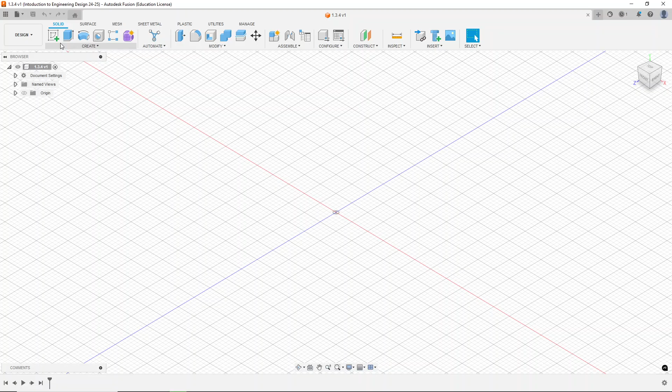So we're going to create a sketch. We're going to put this in the bottom plane, so like the horizontal plane, and we're going to create a rectangle. There are three types of rectangle tool: the 2-point rectangle, where you pick the opposing points; the 3-point, where you just pick all 3 points and then it builds a rectangle around that; or a center point rectangle. That's the one we're going to use today.

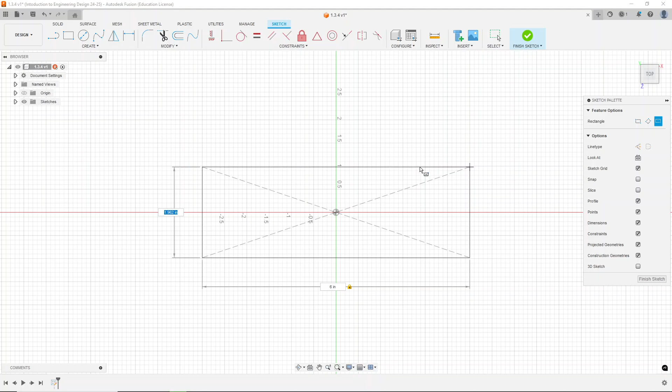So we're going to put that center point of our rectangle right on the origin, just because that will lock down a rectangle. And that's usually the best practice, is you want your geometry to be touching that origin in some way, just so it has a reference point. When you first start a sketch, there's only one lockdown reference point, and that is the origin, so we're going to make sure we use that. Your rectangle should be 6 inches wide and 4 inches tall. We can hit enter. Now we have a rectangle.

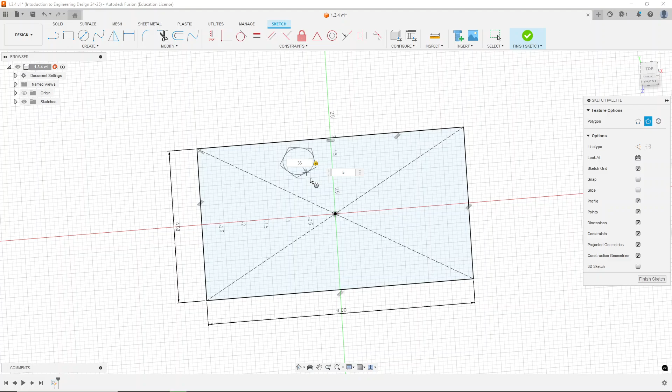We're going to add a few other polygons. So we're going to start with a circumscribed polygon. We've used this before with our hexagons from the last project, but now we're going to make some different versions. So to begin with, we're going to make a pentagon. Remember that trick, hitting tab to go back and forth between these windows. We're going to make a pentagon that has a radius of 0.35 inches. So 5 sides at 0.35. We're going to create that pentagon.

Just create it somewhere in this top region, because later we're going to make it vertical constrained to this center point. So we want to make sure it stays up there. If we put that pentagon over here on the side, it would make it a horizontal constraint. So we'll just make sure it's over there for now.

Next, we're going to create a polygon that is inscribed. We'll put that over here in the top right corner. So we're going to give that a radius of 0.25. And we're going to let it keep 6 sides because we want to keep it a hexagon.

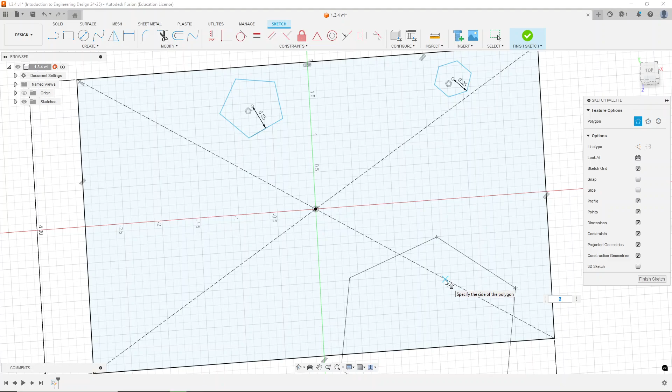And then finally, we're going to add an edge polygon. So we're going to make a triangle. This tool looks a bit different because we're just starting with a line. So we're going to get a line that is 1.25 inches long, hit enter, and all we've done is create a line. But as soon as we move our mouse cursor away, it starts to build a polygon and asks us for how many sides. So I'm going to hit the number 3. That gives us a triangle. This is an equilateral triangle, which just means all 3 sides are that same length.

So we have our 3 polygons in our rectangle. Now we're going to start constraining them to put them where we want. Now, if you notice though, my mouse has a little icon on the bottom right because it still wants to make polygons. So I'm going to hit escape to get out of that. Now I can start adding constraints. So I want the horizontal vertical constraint, which is up here. I'm going to hit the center point of my pentagon and the center point of the rectangle. Now that pentagon is locked so that it is exactly vertical of this center point of the rectangle.

Next, I'm going to hit a horizontal constraint on one of these lines. So now this line must stay horizontal. And then I'm going to hit the letter D to add a dimension, or you can go over here to create and hit the sketch dimension. I'm going to grab that horizontal point I just constrained, that line, and I'm going to grab the center point of the rectangle, and I'm going to pull it over here to the side. And now I want this to be 0.5 inches. So that just means this pentagon, this horizontal piece of this pentagon must be 0.5 inches away from the center of this rectangle.

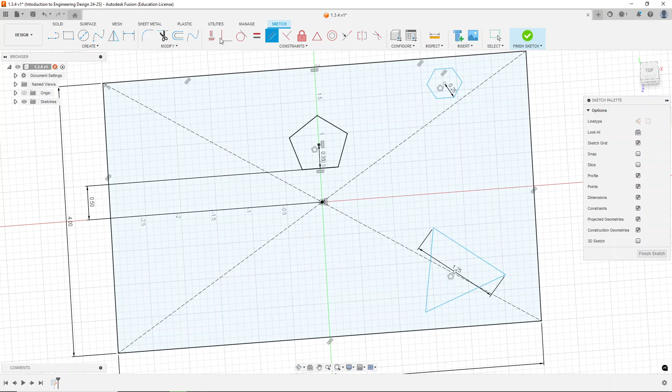Now to start constraining the hexagon, we're going to start with a parallel constraint. We're going to take one of these sides and make it parallel to the top edge or the bottom edge of the rectangle, the 6-inch length rectangle. So now that side is parallel with the 6-inch side of the rectangle. We're going to add a coincident constraint. We're going to make the center point of this hexagon be coincident with this line.

And now we're going to add, by hitting D, another constraint from the center point of that hexagon to this edge, and we're going to say this needs to be 0.5 inches as well. So now that hexagon gets pulled up into the side.

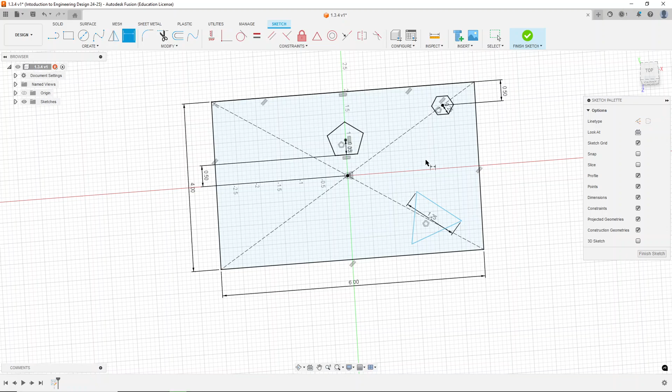Finally, we're going to constrain this triangle. So we're going to add a coincident constraint at the tip. Just be careful, make sure you get that little white dot. So we pick the tip of this triangle and then the tip of the rectangle, so those are now coincident. And then we're also going to add a coincident constraint with the center of the triangle and this dotted line.

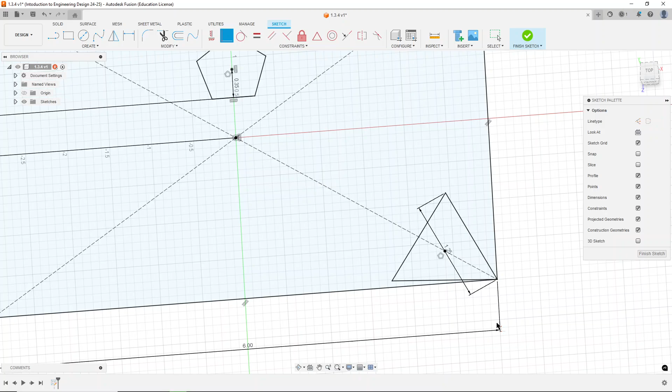So now looking at this sketch, you should get in the habit of looking for these black lines, because this tells you that your sketch is fully constrained, which just means if I hit escape to get out of my tools, if I try to drag any of these lines, they're staying where they should be, which is good.

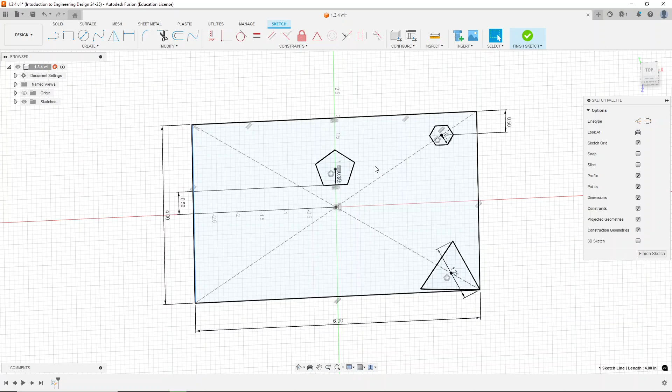So when I start to mess with other numbers later on, it's not going to affect the placement of these objects. So continuing on, we're going to start adding some more patterns. We're going to use some new tools. So some of those tools, if we go here to this create section, we have circular patterns and we have rectangular patterns.

So to begin with, we're going to create a circular pattern of our pentagon. So we hit the circular pattern tool, and now we get this new palette up here. We're selecting our object, so we're going to drag and drop over all of our pentagon. Alternatively, I could go through and just click each of the 5 lines of our pentagon. After I do that, I'm going to hit over here.

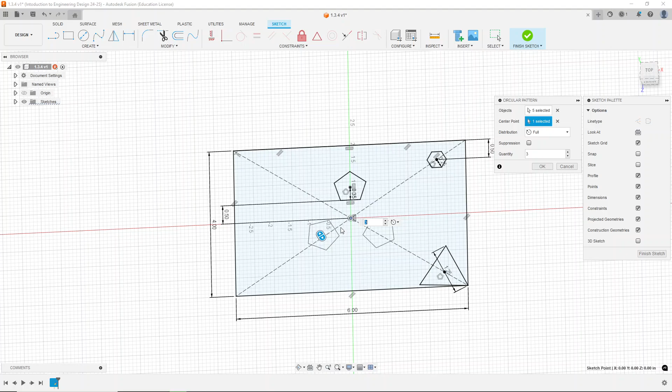So now I get to select the center point of my pattern. So I want it to be the center point of this rectangle. So it automatically gives us a pattern with 3 pentagons. I want 5 pentagons though, so once we do that, hit OK. Now we have 5 pentagons that have rotated around that center point of our rectangle.

Next, we're going to create a rectangular pattern. I'm going to select our hexagon, and then we get a couple different numbers we can put in.

We're going to leave it at, we're going to go from extent to spacing rather, and rather than selecting our directions, right now we have these 2 arrows. If we start to drag either of these arrows, you can see how we start to space out some additional hexagons. We're going to call this -0.7. That looks like a good number, and we can leave it at 3.

Now, if we grab this other arrow and drag it down, we start to get more hexagons. I don't quite want 3, I want to just do 2 rows of hexagons. So now we have 6 hexagons in this position.

And if you look at the window over here with our rectangular pattern palette, we have those directions, and we can say symmetric, and that would split it up evenly on both sides. We're going to stick with one direction though. So we have our set down here: quantity, distance, and direction.

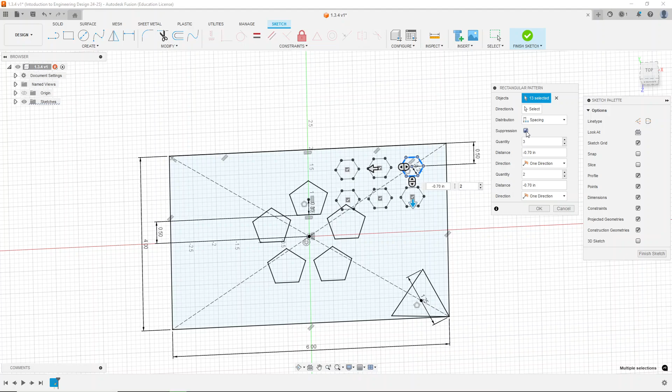Those are our hexagons going down. And then our quantity, distance, and direction, these are our hexagons going to the left. If you look though, one of these hexagons is overlapping with the pentagon, and I don't want that. So I'm going to hit suppression, and then we get these little check boxes that pop up on all these hexagons. I'm going to click this one, and that means that hexagon is not going to be created in this pattern. So now I can hit OK, and now I've created 5 hexagons in this pattern.

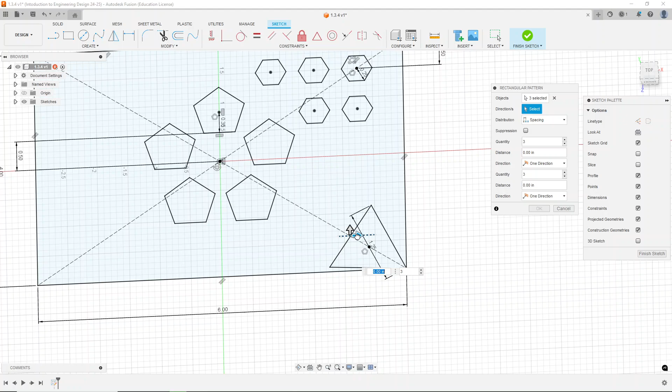Finally, I'm going to create another rectangular pattern for this triangle. So I'm going to select all 3 sides of the triangle. You see objects selected, I have 3, each of the 3 sides. For directions, rather than doing the left and up like we just did, I'm going to choose this line, and I'll get rid of that direction. So now we're going to go along this line.

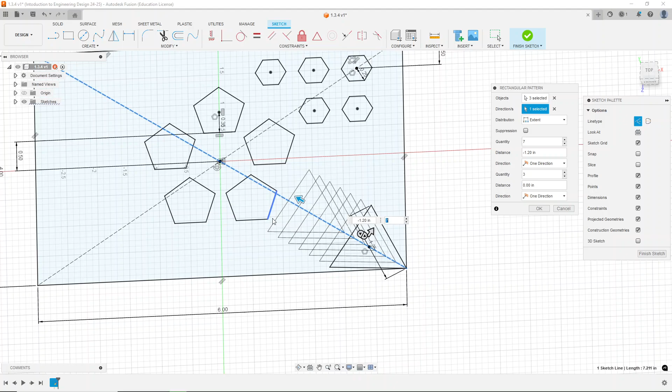I want 7 triangles, and let's just bring these down enough. We'll go to extent. So the difference between extent and spacing: for extent, I'm just telling it how far out the triangles are going to go, and then it's going to space out however many I tell it to put in there. If I go to spacing, I'm telling it how much distance should be between each of these triangles. So we'll go with extent for this one, and I'm just going to pull it back just enough so that it doesn't overlap with that pentagon we have in the middle. So let's do -1.20 inches for those 7 triangles.

So now we have our patterns up here, and we're going to finish our sketch at this point.

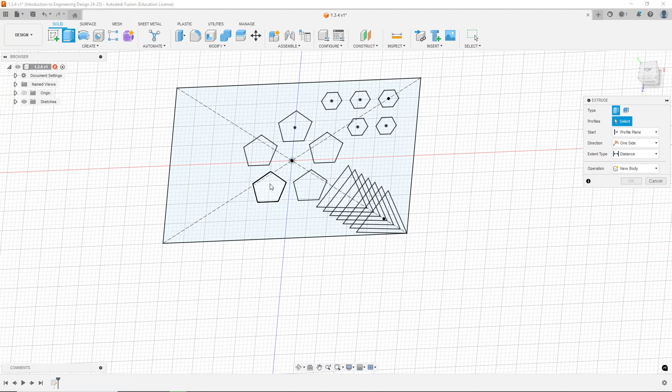From here, with our sketch up, we're going to create an extrusion. There are a lot of different sketches we can choose from, but first we're going to choose the rectangular base in general. We're going to grab that, and then grab a few sections of these triangles. I think we take this first triangle, and then we're going to alternate with these others, so we create this kind of arrow-like shape.

So now we have these 3 cutouts that remain from our triangles, along with our 5 hexagons and our 5 pentagons. Let's extrude that. Let's go 0.2 inches. Seems like an appropriate depth.

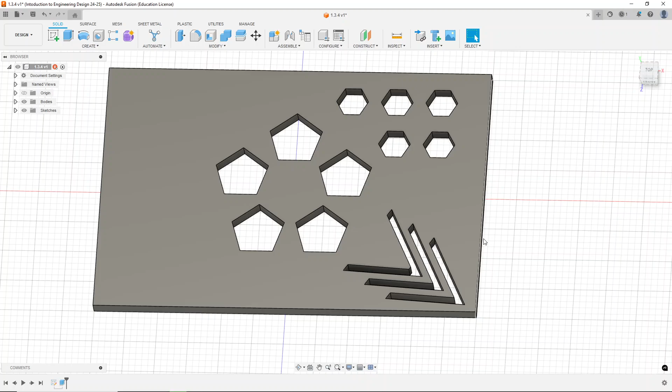Just like before, anytime you use a sketch to create an extrusion, your sketch disappears. But if we hit this drop-down arrow, we can hit the eyeball, and our sketch comes back underneath, and we can use that to build on later if we need to. For our purposes, though, we're going to create a new sketch, so I can hide that sketch since we don't want it to confuse our geometry right now.

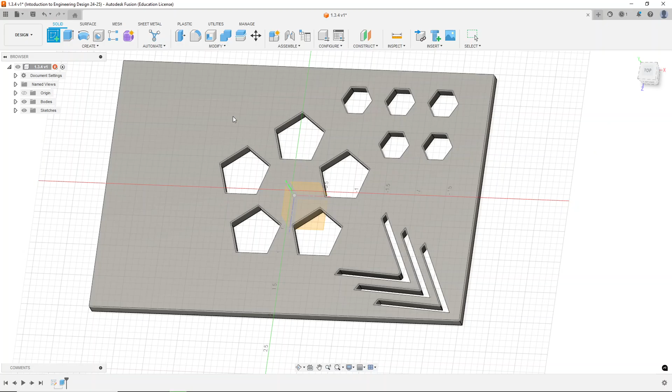We're going to create a sketch on the top surface of this thing we just created. So don't choose the orange squares right now. We want to choose the surface of this object we just made, because when we do that, we get the lines that are in this object as part of our sketch geometry.

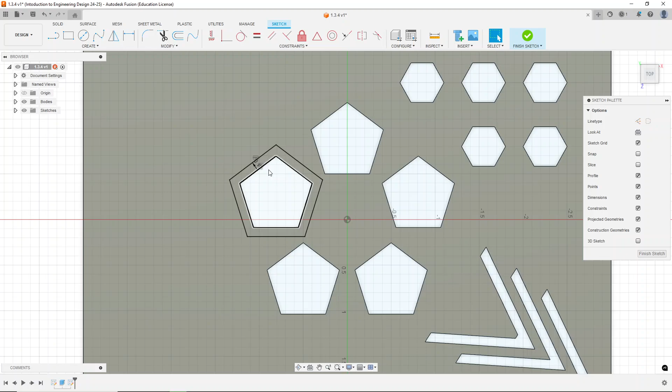Now we're going to create an offset and choose 3 pentagons. I don't care which 3 you choose. I'm going to start with this left one, and create an offset that is negative 0.1 inches. You see it creates a line that is just offset from the hexagon or pentagon that already exists. I'll do another one over here, negative 0.1, and I'll do this one down here, negative 0.1.

Now looking at our pentagons and our offsets, some of these interact with one another, and we don't want that to happen. So now I'm going to go to modify, and we have this fillet command. So we're going to create some fillets.

If I put my mouse cursor right on the tip of a point where I get that white dot, it gives me the projected view of what the fillet would be. If I choose a line, it's going to wait for me to pick the other line to fillet. So any 2 connected lines, you can create a fillet, or you can just choose the point that you're wanting to fillet. So I'm going to choose this point.

I'm going to give it a 0.2 inch fillet, hit enter, and continue doing that for all of the points on all 3 of my offsets. So: fillet tool, pick the point, 0.2 is our radius for our fillet, and then repeat for each of these 15 points.

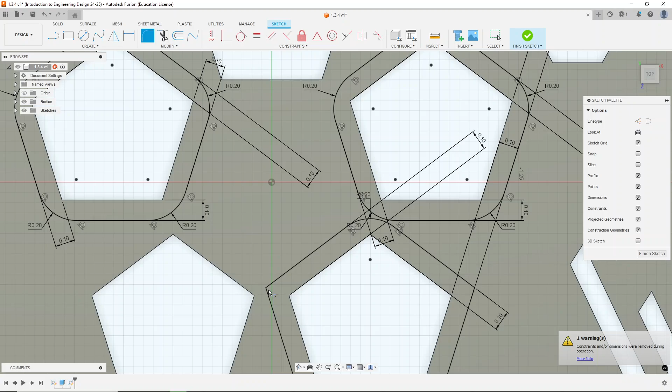Something you can do as well, if you just right click, there's the repeat fillet button. So rather than going to find it each time, you could do that. If I right click, repeat fillet, I can grab that fillet tool right away.

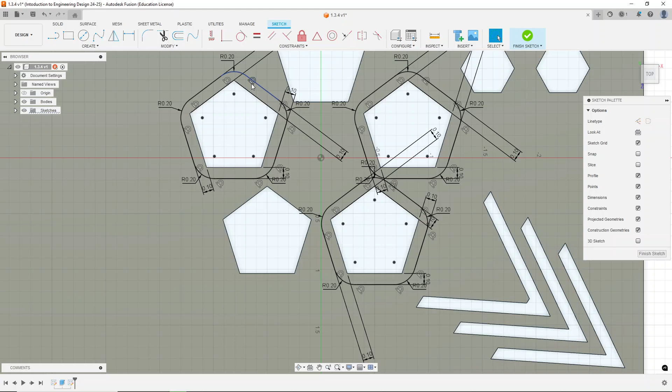Perfect. So now I have fillets on all of my 15 corners of the pentagons I just created, and I no longer have them intersecting. That was really tedious.

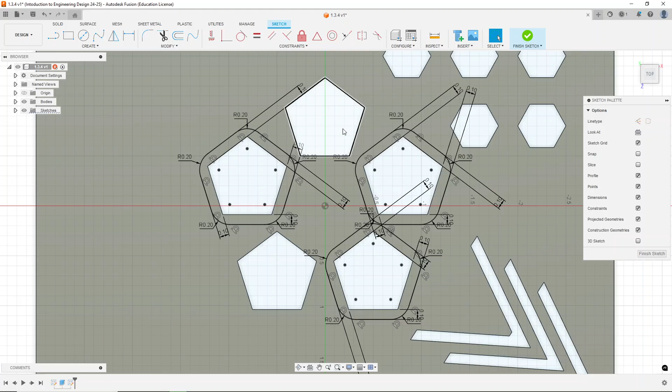One way we could have made this happen that might have been a little easier is if we just did one of these pentagons, and then created a circular pattern to bring them around, and suppressed the ones we didn't like. So just know in Fusion, there's always multiple ways to get things done. The way I'm showing you doesn't have to be the best or only way. It's just how you're going to get there. In this case, this is probably the longer route.

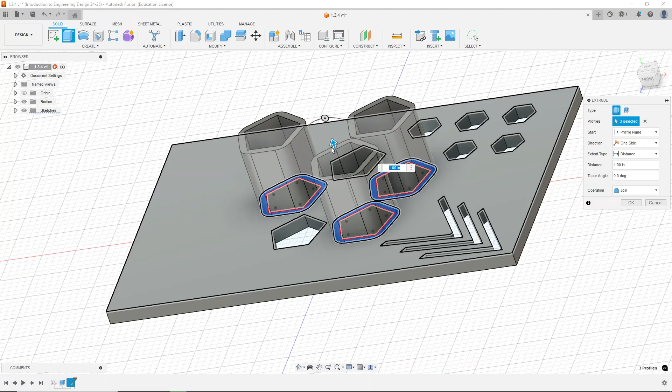But at this point, we can finish our sketch. And now we're going to extrude these regions we have just created. We're going to pull those up. Let's pull them up 1 inch, hit enter, and now we have this odd shape that we've just created for our first part of 1, 3, 4.

To continue for the second part of 1, 3, 4, I'm going to open up my bodies. I'm going to hide this body so we don't have to look at it for the next piece we're going to build in this section.

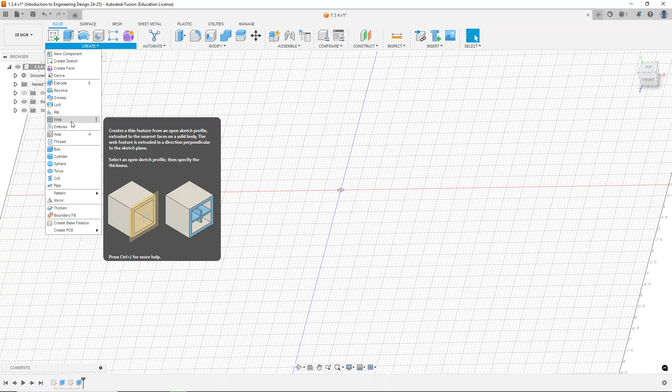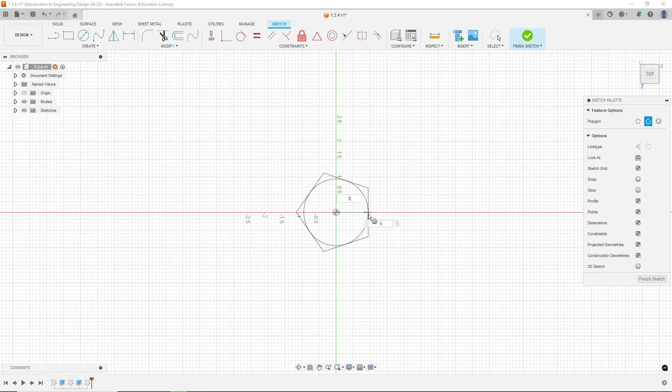For now, we'll go back into Fusion. We are going to start by creating a polygon. Oh wait, sorry, we need to start with the sketch first, so we'll do that on the horizontal plane. We're going to create our polygon, and we want a circumscribed polygon. We'll put it at the origin, hit tab. I want this to be 5 sides because we're making that 5-sided tool holder. And I think this was about 2 inches in diameter, so I'm going to give it a 1-inch radius and hit enter. So now this is going to be our base. We'll finish our sketch.

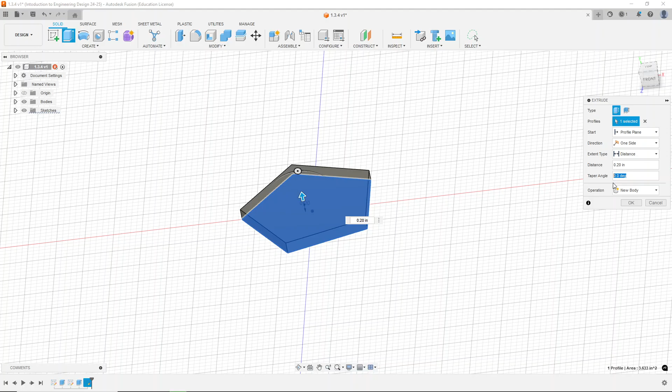We're going to hit extrude, and we're going to pull that up. Let's do 0.2 inches. And then we have this thing called a taper angle, so we could do this right now by introducing a taper angle. If we put this in at -45, you can see it tapers that object inward, so we start to build in. If we leave that at 0 though, it would just make our regular pentagon.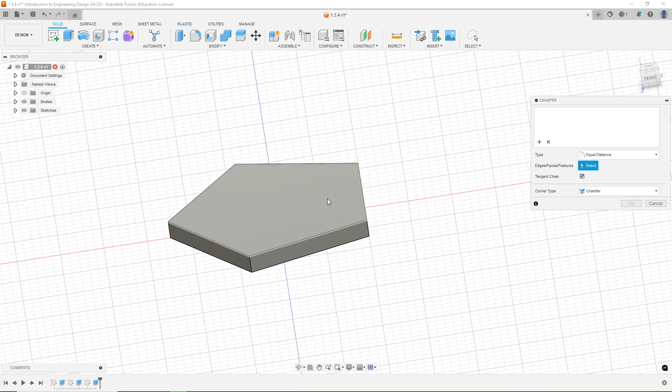So you should just do the -45 and hit enter, but I'll show you a way you can do that without. Again, there's multiple ways to get things done. I could just make my pentagon shape, and I could hit chamfer, hit this top surface, and then now I have a distance of 0.2 inches, and I would get the same object in the end. Either way you do it, you're going to get the same object. It's just about how you're using the tools or what pathway you want to take.

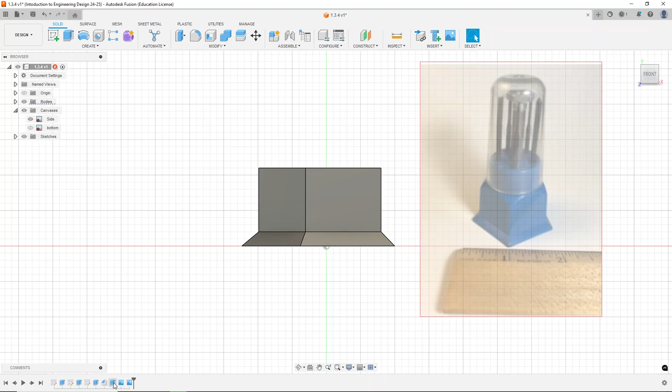Now from here, I'm going to extrude again without making a sketch, and I'm just going to choose this profile, and we're going to pull it up some distance that makes sense. So in order to help me make sense of how tall this should be, I'm going to take a pause and bring in a canvas so we can reference. So I brought a canvas in, which is the picture from our notes, which you can also just reference with your iPad if you need to. But I messed up my second extrusion, so I'm going to click that, right click and hit edit feature. So this is where you should be at, bringing up that section.

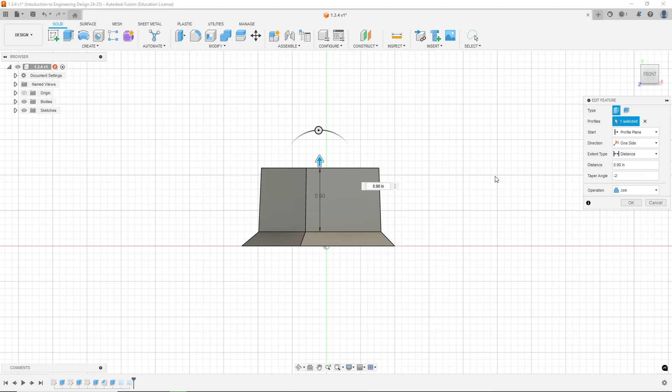I think 0.9 is actually a good height, but we need to add a taper to this as well. So we're going to say -5. That seems a bit steep, so maybe a -2 degree taper. A negative taper just means it's smaller at the top. I'll hit OK, so now we have this taper going upward. Again, because it's injection molded, that just means everything needs to be tapered to the top so they can leave the mold easily. So now we have this part at the top, and we're trying to get it to eventually become a circle.

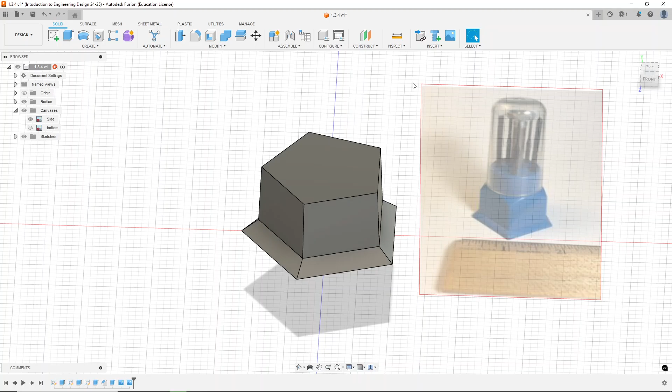So we have a 5-sided shape, and we're trying to turn it into a circle. That can be really complicated if we're trying to do it by hand, but luckily there are some tools to make that easy. The first thing we're going to do is construct an offset plane. An offset plane just gives us a place to sketch that is offset from some other place on the project that we would sketch from. So for our purposes, since the circle base is kind of at this point, we're just going to bring this up to about where we think the circle base should maybe begin. So maybe 0.2 inches up.

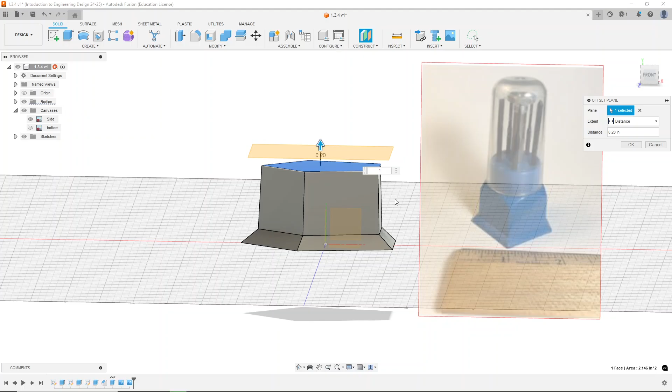We'll hit enter, and now we're going to create a new sketch on this new plane that we have. So if we look, our sketch is kind of floating above where our object is. If I were to try to draw some things, they wouldn't be able to connect to these lines very well. So I'm going to hit the letter P, which brings up my project window. I'm going to select this top surface, the pentagon, and hit OK.

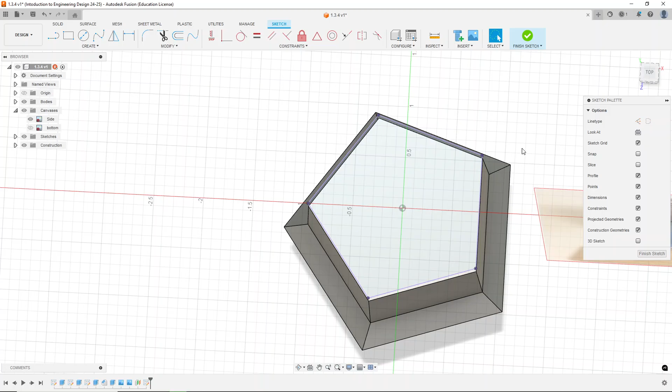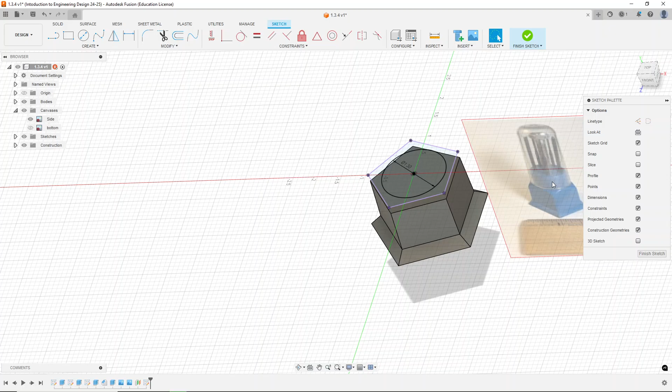So now the points of my pentagon are available to me along with the center point, which is really important. So I'm going to create a circle. This is a center point circle, so I'm just giving it a diameter, and this needs to be some diameter smaller than whatever my pentagon is. So I'm going to say maybe 1.3, and that seems like an appropriate relationship to what's here.

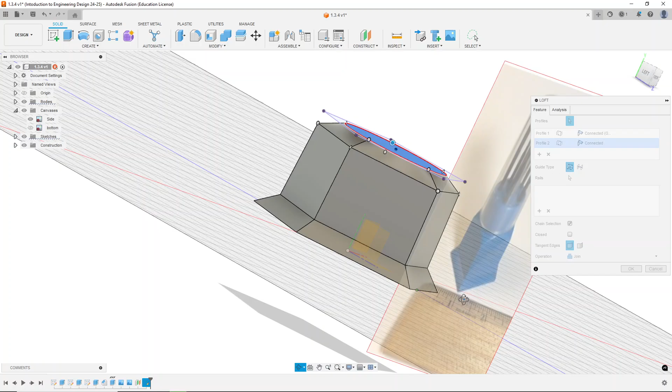So now we have this circle as a sketch. We're going to finish our sketch, and we're going to do create, loft, and if we pick our pentagon surface and then pick our circle surface, it will just mathematically connect those. So we have this thing that goes from a pentagon to a circle, and now we can hit OK. So now we have that transition of shape.

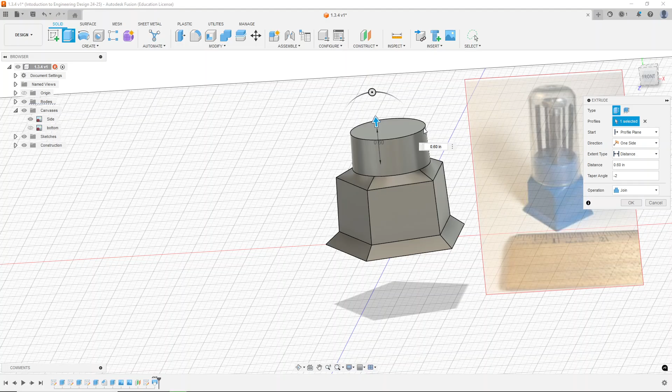We're going to do another extrusion coming up from here for this last little chunk that is up. I think that might be 0.6 inches, seems good. And again, since this is something we're preparing for injection molding, we would add that negative bevel in here, that taper angle, to kind of have it be able to eject easily. And we're going to hit OK.

So we kind of have the base ready. So there are 5 holes for drill bits. So we're going to create a sketch up at the top, and we are going to define some position where we think a hole should be.

So I'm going to turn this into a construction line going from the center. I'm going to hit tab and lock this to 90 degrees. And I could position where I want that hole to be using this line.

Alternatively, similar to what we did last time, I can just create a circle. I don't want this to be a construction line this time. I'm going to say those are, let's say 0.18 inch diameter drill bits. In reality, we would measure the size of that. I'm going to hit enter, so now I have this circle

positioned here. I'm going to constrain it vertically with the center of this circle. And I'm going to hit the letter D so I can add a dimension between those 2 center points over here, and I'm going to say that should be 0.35. That doesn't look quite right. Maybe 0.4, maybe I'll like that better.

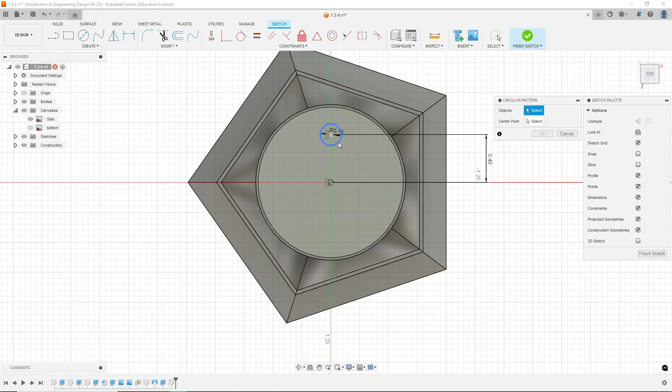Now I'm going to create my pattern. This would be a circular pattern. I pick my circle, then I'm going to go select the center point of this main circle, and I want there to be 5 of these holes. Hit OK, now I have my 5 circles.

I can finish my sketch. I'm going to extrude each of these, and we will go down. Sure, let's go down 1/2 inch and hit enter. So now we have 5 holes down 1/2 inch.

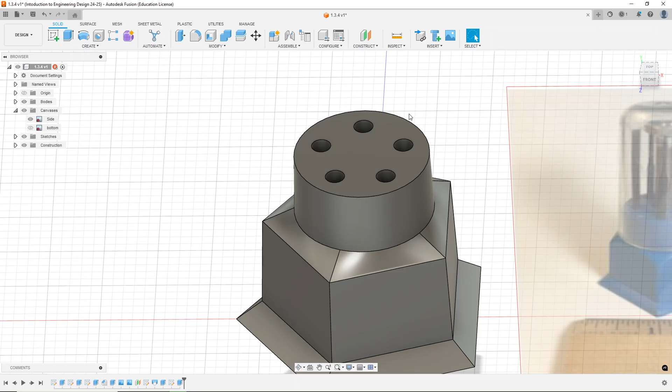Additionally, though, this object had a hole in the middle, so we're going to add that feature as well. Although I think that feature was explicitly just for injection molding, so that it could be punched out of the machine, we're going to add it anyway. So we're just going to add a larger circle. This one can be 0.35. That seems appropriate. Hit finish.

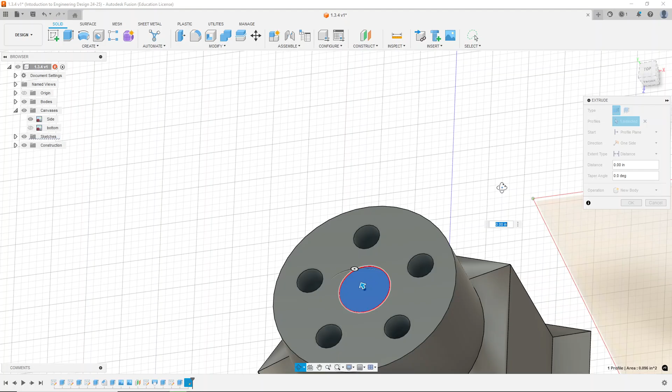And we're going to extrude that circle down as well. We're going to go down, we'll do a negative 0.5 for that one as well. So now we have that hole going down. Then finally, we'll add a fillet to this top outer edge, just something really slight, so maybe 0.025, just to kind of break that hard corner.

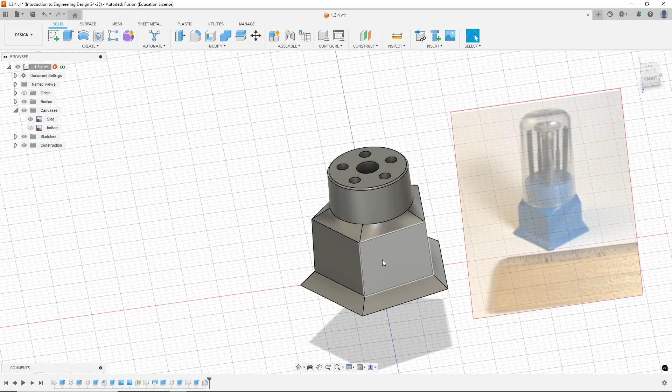So now we have our base. So something else with injection molding, often they are very hollow parts, so it's just like the shell of whatever object. Our object, though, in Fusion is solid. So for a 3D printer, that would be fine because 3D printers don't make things solid. They actually have kind of a structure on the inside that is mostly hollow.

For our purposes for this model, though, we're going to turn it into something that looks like it was injection molded. So if we go to Modify, it's up here at the top, but we can also go down and find it right here, the shell command, and this kind of shows you what that looks like. It just turns some solid body into a shell. So if we do that, picking our faces or bodies, so the face we click is the one that's typically going to be open.

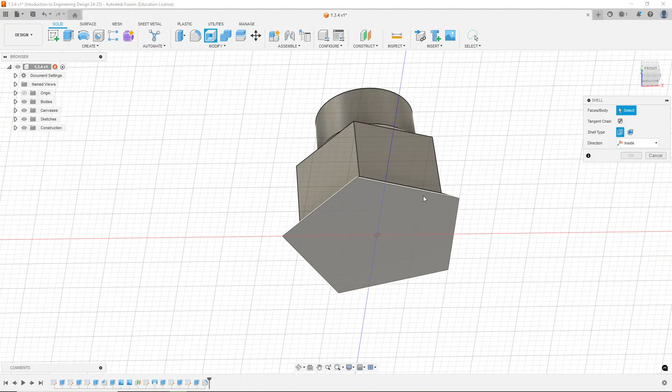So if I click from the bottom, we're going to go inside. We want a shell thickness. Let's make this 0.1 inches maybe. That seems a bit thick. So maybe 0.06 inches.

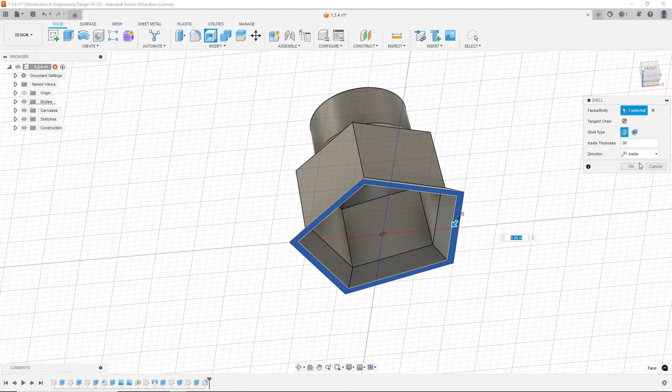So now it's going to create a shell for all the surfaces, but it's going to get rid of this bottom face for us. Since we're going in the inside, if we went outside, it would create a shell going in the outward direction. So I can show you that. If I go 0.2, it builds up on top of what we had just made, which isn't what we want in this case. So we want this to go inside, our 0.06.

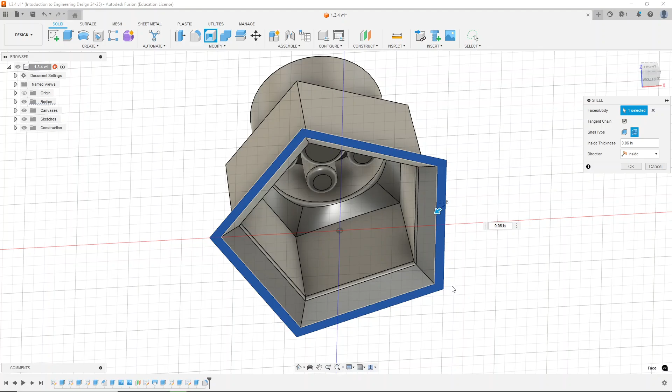So it's just that outer line of our body that determines what direction the shell is going to go. We could also make this a round shell, which rounds off all the corners on the inside, or we can keep the angles sharp. For our purposes now it doesn't particularly matter, but just know that's a tool if you ever need it. So we're going to hit OK.

So now we have our shelled out screwdriver bit holder.

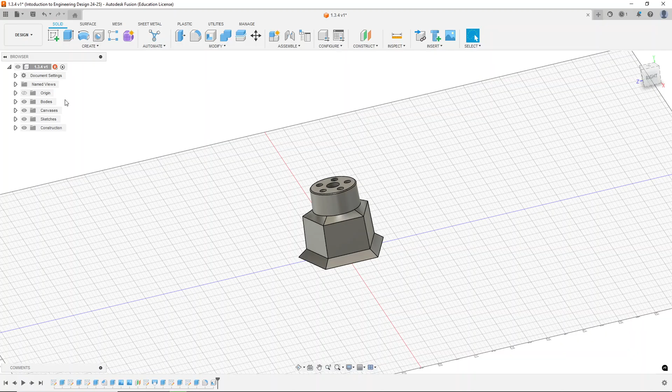Something else we're going to add to this, if we pull up that canvas again, it has a kind of dome protecting it. So we're going to do one more feature.

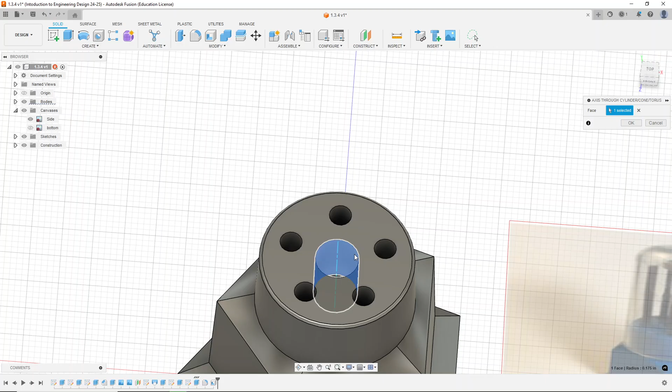So if I go back to construct, I'm going to do an axis through a cylinder. So I'm going to pick this center hole. Now it gives me that dotted line, that center line through the center of it, and I'm going to hit OK.

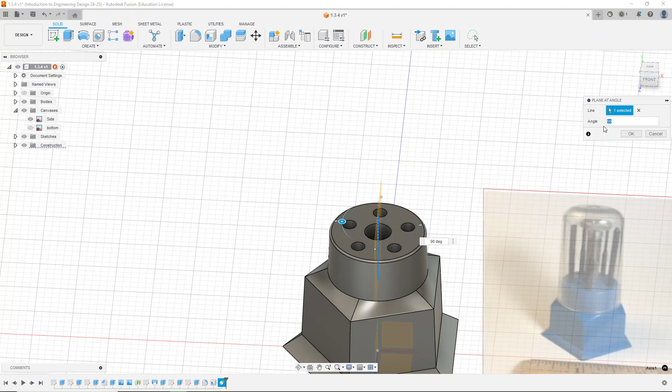Then I'm going to construct a plane at an angle. I'm going to hit that line. So now it's giving me a new sketch plane that I could use that is exactly through the center of that circle. I could also change that angle to 90 or 30 degrees or whatever angle I want. I'm just going to leave it at 0 for now.

So now I have this sketch plane. I'm going to create a new sketch on that plane. Now that I'm here, I'm going to hit project.

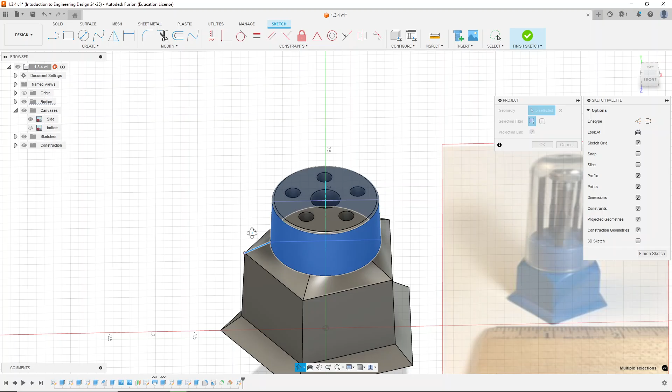I'm going to hit the surface of this taper, and I'm also going to hit the geometry here. Since I picked the sketch plane, that would exactly show me all the way over to this edge, and then I can also do the same thing over here. So I get the shortest possible edge and the longest possible edge in that slice. So I'm going to project all those pieces.

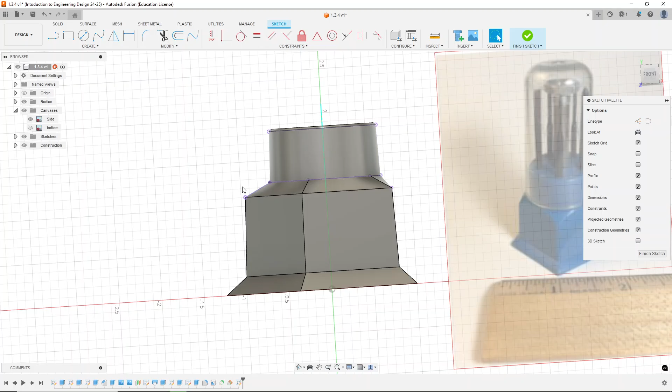So now I can kind of see where this lid would be resting once it sits down. So what we're going to do, we're going to start with a construction line. We're going to find that center point. We're going to go up, let's go up 2 inches. That seems nice.

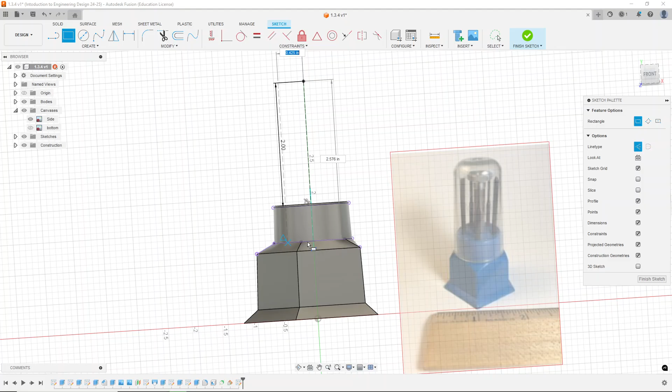From this point, we're going to do a rectangle. We'll go over, let's turn this off construction. We'll come down onto this side. But if we line it up with this point—if we imagine this turning into the piece that was going to be the lid—if it went all the way down here, it would interfere, it would touch that part of the base.

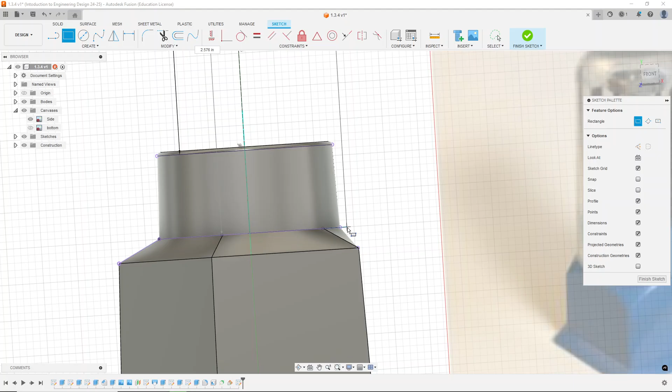So we're going to stick it at this point. To get that to happen, if I go to the point and get that blue square, and then slide over, I get a dotted line that's hard to see. If I line up both points, I could get them to give me both constraints. But if it doesn't, I'll just go right here for now. Then I can add that coincident and have those be coincident with one another, but that would bring me all the way down.

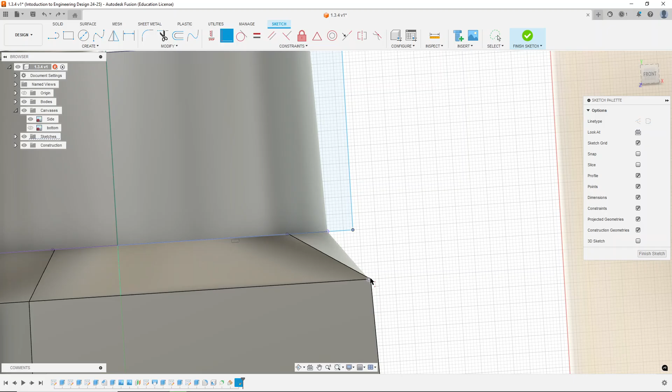Or if I go backwards, I could make them collinear lines between these two lines. What might work best, or what I could show you to have a lid that would fit perfectly, is if we go all the way down—and I'll show you a new tool. So now that is coincident, so it's going all the way down to this part of the base, which is the thinnest part.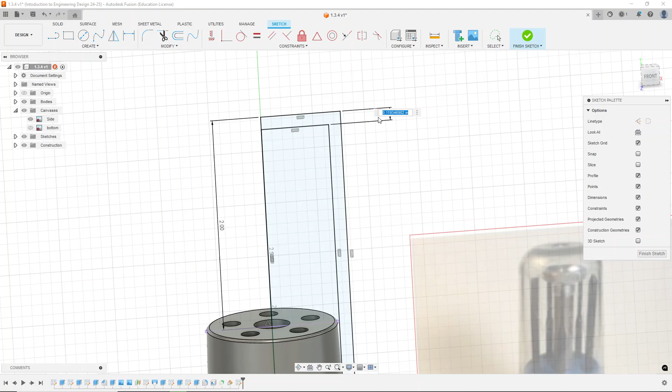So now we're going to create another rectangle coming from this point. We're going to go up some distance and then touch back to our center line. Hit escape. Add a dimension between these two lines. That will be some number—we'll just do 0.1 for now. Let's see, what is the distance between these two? So I can see the distance between the rectangles already built was 0.119, and that's based on the distance between these 2 points.

I can find that by going up here to the inspect tool. That lets me pick any two points and it'll tell me the distance between them.

I'm going to mirror that on the top so it's the same thickness. I'll go 0.119, hit enter. Now I have this consistent thickness built up on this rectangle.

I'm going to finish my sketch, and I have this profile that I can rotate around now. If I go to the revolve tool and pick that profile, you notice it's cutting into the base right now, which isn't ideal.

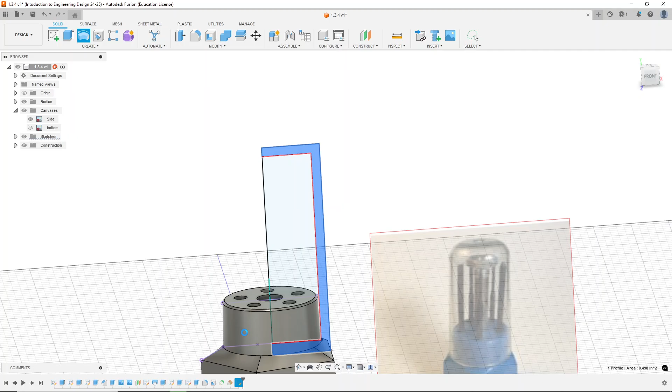So I'm going to hit cancel, right click my sketch, hit edit sketch, and just add a line continuing down from here. Now it connects the smaller rectangle with the larger rectangle, and I can hit finish sketch.

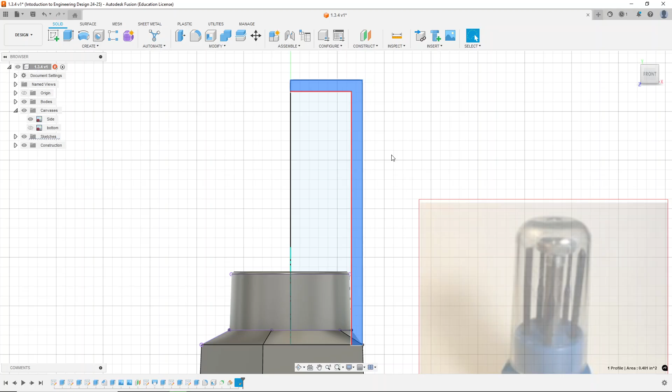Now when I select that profile, it gives me that edge going straight down, and we're going to revolve it around the center axis we just created.

Right now it tries to cut because it was intersecting, but we don't want it to cut. So for our operation, we're going to say new body. You can see it creates this solid shell around our object. We'll hit OK, and it created that new body.

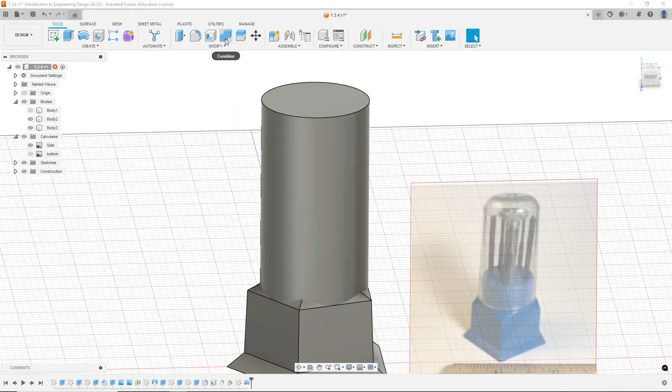If we open up our bodies, we have our hidden body that was our rectangular piece, our base, and the lid. If we go to combine up here and modify, we have our target body, the thing we want to change, if we select body 3. Our tool bodies are what we're using to change it, if we select body 2.

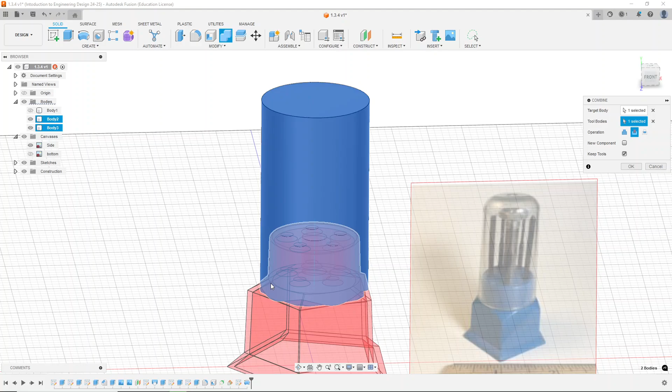The operation: we don't want them to join into one piece, we want them to cut. So we want the tool body, the base, to cut away from the lid. We're going to hit keep tools, because after this is done, we don't want our base to go away—we want it to stay around. So we hit OK.

Now it looks like nothing has happened, but if I hide our bodies, we can see the lid now has this contour that would fit perfectly with the base we just made. It looks like we also have the inner ring that got cut off of that.

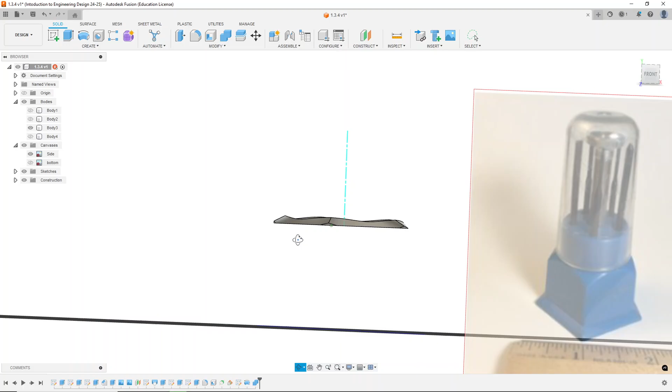So this is body 3 now, probably the same for yours. But if this ever happens, if there's a piece you don't want present, go over to that body, right click, and don't click delete—that's different in Fusion. Instead, choose remove, because this gets added to the timeline, meaning I can undo it later if I feel like it. So always remove, never delete.

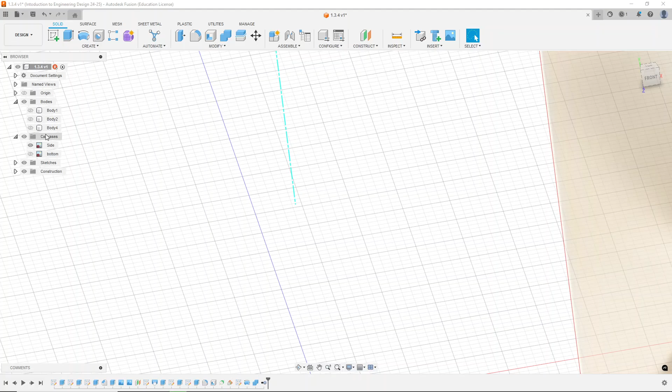Now we have the case with a lid. Looking at the top, we can add a fillet to the outer edge, and we should also add one to the lower or inner edge. So I'm going to come in here...

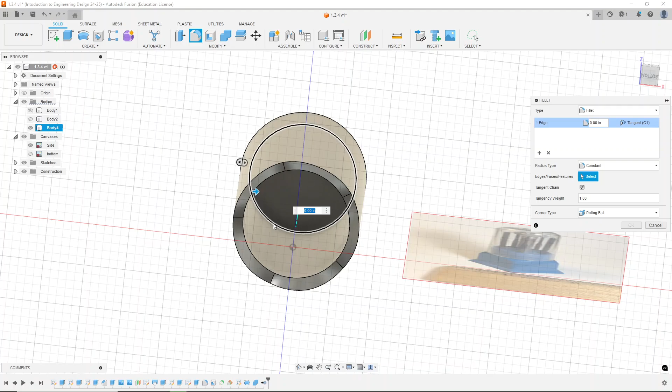hide the base that was in our way, select that inner top corner, and select this corner, so now we have those two rings. We're going to add a fillet of 0.2—actually, let's go further. 0.4 looks great. So now we have our lid and our base.

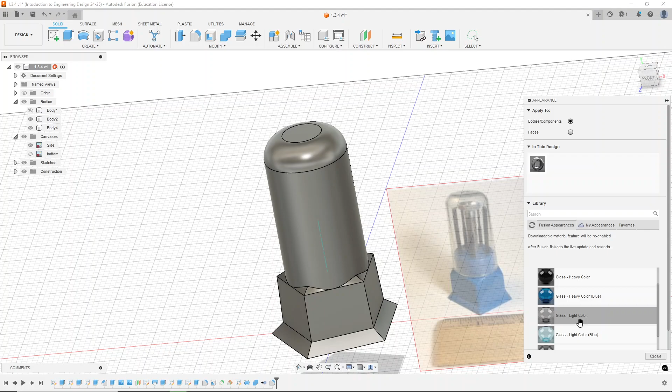Something else we can do: if we hit the letter A, we get an appearance window. Looking at this window, we have Fusion appearances. If we click Fusion appearances, we go to glass, and I can click any of these. I'm going to go with a light color glass. If I click and drag that, I can drop it onto my lid.

Now it turns it into a piece of glass. I don't like that—that glass became darker than I thought. Let's do glass clear instead. Yeah, there we go, so I have this clear piece of glass.

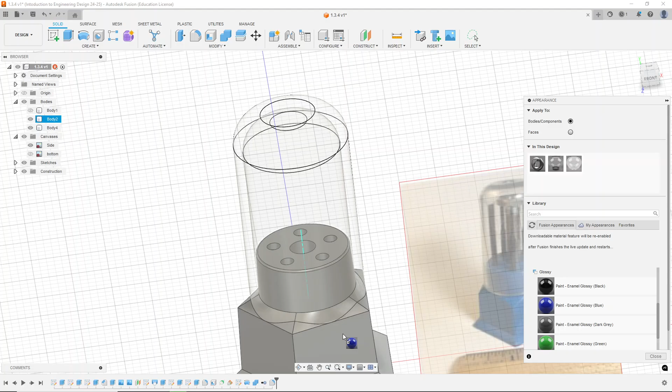So I can hide those again, and make them collapse by clicking the names. Then maybe let's go down to paint and a glossy paint, and put a glossy blue on the base. So now we have painted objects, and we can change the material they're made out of as well.

Now we're done with the appearance. We can hit close, hide our sketches, and now we have our screwdriver bit holder.

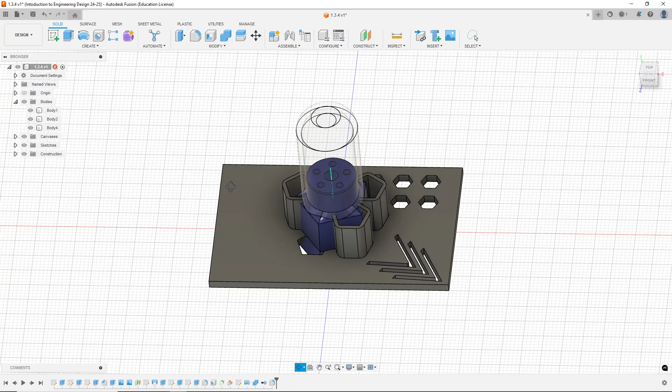Unhide your original object as well, since they're kind of overlapping each other. Let's click object 1, our body 1, right click it, move or copy, and just drag this arrow over until they're not on top of each other anymore. Hit OK.

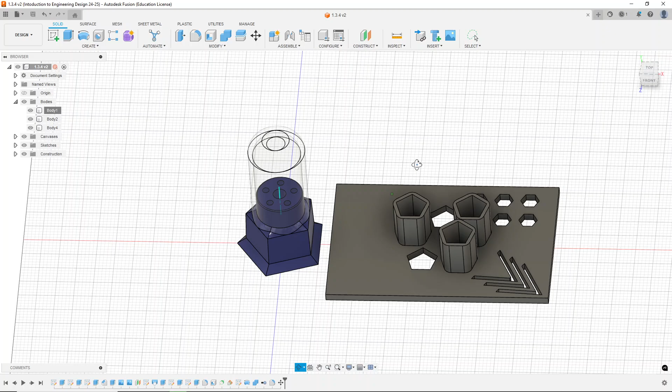Then at this point, save in the top left—user saved is fine. And there we go. This is all you need to do. Now we're done with 1.3.4.